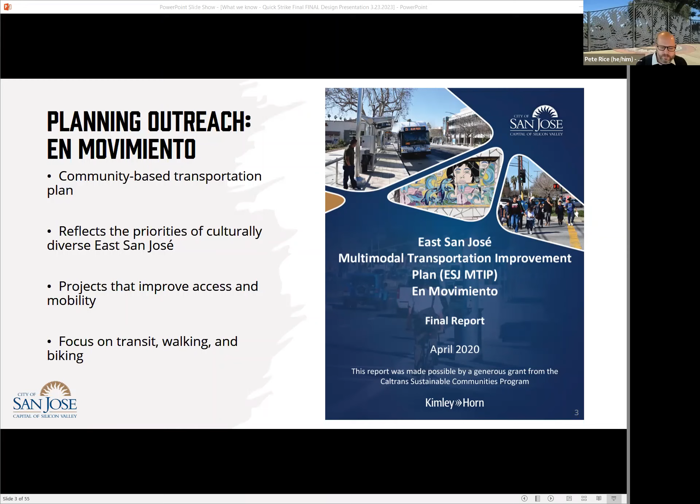These are some of the key takeaways from the Movimiento planning process. We asked community members about challenges to walking and biking and taking transit in East San Jose, and high vehicle speeds were cited as the number 1 challenge. We also asked about potential treatments to address issues, and traffic calming and enhanced pedestrian crossings were 2 of the treatment options most supported by the community. We asked community members about their priorities for improving transportation in the Movimiento planning area, and safety and health were among the top community priorities.

Finally, something we heard quite a bit from the community is that implementation of projects is a priority, right? In other words, less talk, more action. We were politely asked to start delivering on projects.

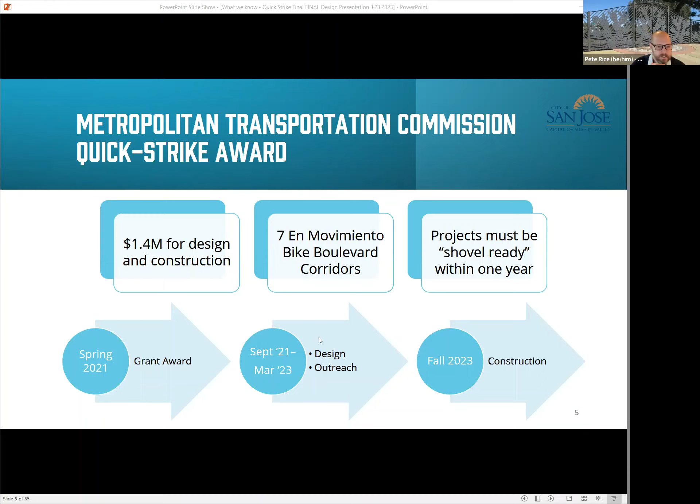So that brings us to how we got here tonight. This project was made possible by a grant from the Metropolitan Transportation Commission, that's MTC. It's a program they call Quick Strike. We were awarded $1.4 million for design and construction of 7 project corridors from Movimiento. The catch is that these projects have to be ready to go relatively quickly. You can see from the timeline here, this is actually a little longer than the initial timeline because we received an extension, but initially we had about a year to complete or to have these projects ready to go. Shovel ready is what it said.

So these are the project goals that have been stated from the beginning, and I think they align well with what we've heard during Movimiento. We want to make these streets safer for all, but especially our most vulnerable roadway users. We want people to slow down, and we want to create a network so people can access a lot of the great places we have on the east side.

So for those of you that are new to this project, it's these corridors in green that we're talking about. Tonight we're focusing on these, we call them 3 corridors, it's really kind of 4. All of these except for 21st Street are bike boulevards or shared streets, meaning bikes and cars share the same travel lane. And to make that safe, we employ traffic calming.

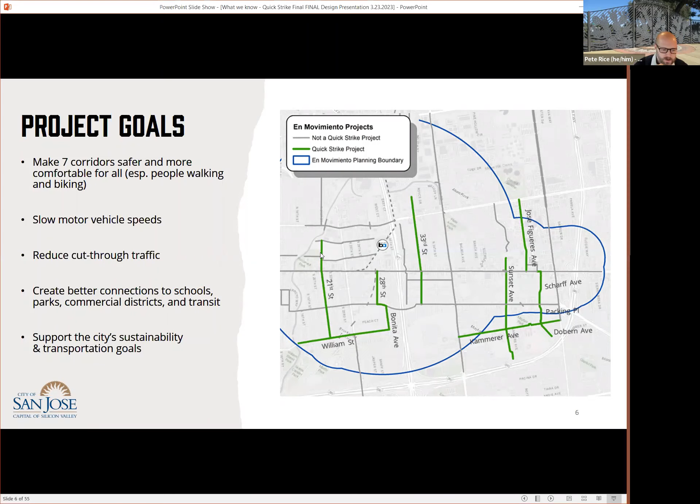For streets like the 7 project corridors, where you're going to have bikes and cars sharing the lane, we have target speeds of 20 miles per hour and volumes of 1,500 cars per day.

As you can see from this chart, nearly every segment, save for 21st Street and Scharff, exceeds that 1,500 target ADT.

My computer really wants to update some software. It keeps making that noise. I don't know if you guys can hear that, it's a little annoying.

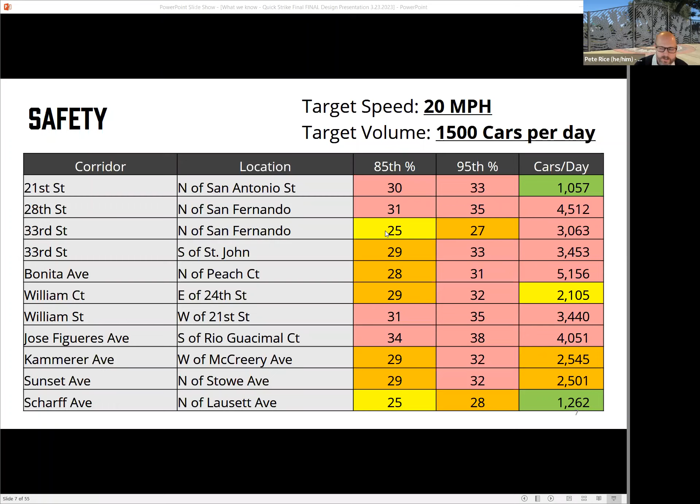Speed is a very important issue. You can see here the chances that you will survive a collision increase dramatically as speed drops. At 20 miles per hour, you have a 90% chance of surviving. When you get to 40, it drops to 20%.

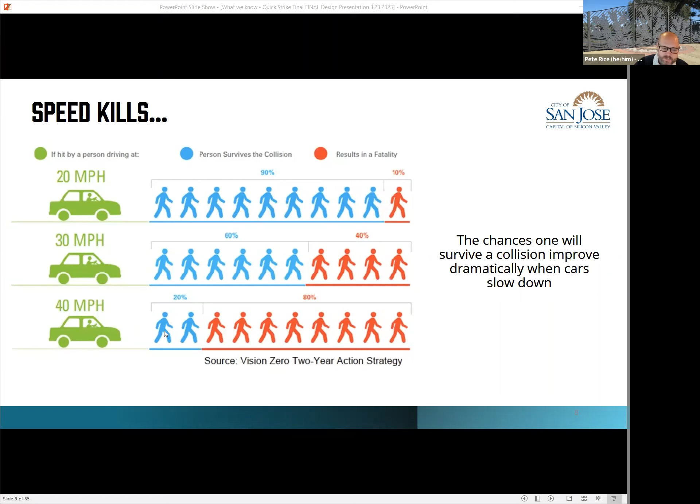This here is a map of our Vision Zero corridors. Vision Zero, if you're not familiar, is a citywide program to eliminate traffic-related deaths and serious injuries on our roadways. These Vision Zero safety corridors are the most dangerous streets in San Jose. You can see many of them are concentrated here on the east side, the southeast. There's also Saratoga Avenue in the west, but a lot of them are over here.

Now, we're doing our best to make these streets safer, but what we're also doing is providing safe alternatives. You can see there's King Road here and Jackson Avenue here. That's what this one is.

Among our project corridors, we have 33rd Street as a project corridor. We have Sunset, we have Jose Figueres, and Sharp. Those are all parallel to these, so alternative routes is one way to put it.

Then going east-west, of course, we have Santa Clara Street here, Story Road. And then in our project corridors, we have William and Kammerer, and then we also have a project from a few years ago on San Antonio.

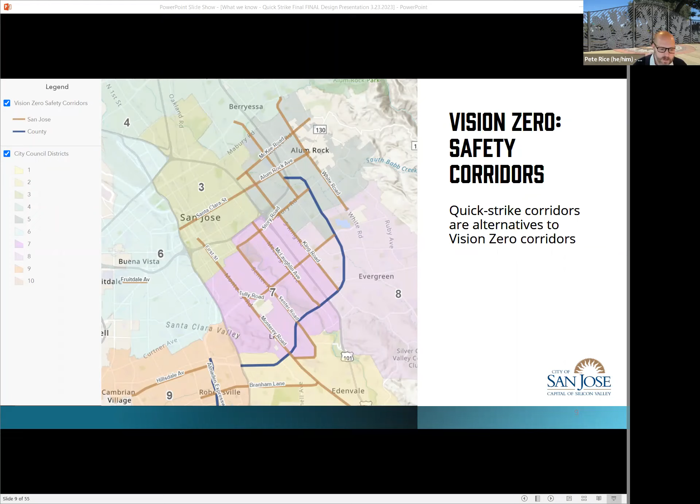So that is some of what we know. Do we have any questions or comments before we go on to what we've heard?

See a few chats. Well, you mentioned Jackson. Yes, so we're going to need another meeting on Jackson. And like you said, Jessica has more information, and that's why I'm just requesting another meeting on Jackson.

Yeah, absolutely. Like I was saying, another team has been working on some near-term improvements, and Jess can fill you in on that stuff. We thought we were going to get $10 million, but we were awarded about $4 million. We are working on securing some more money, but we're just going to have to do it piece by piece and keep looking for these pots of money.

I mean, who did we make mad? You know what I mean? Yeah, I mean, we got a lot of money through OBAG. It was overall a success. Yeah, we also need a lot of improvements, so $1 million would have been a success. Yeah.

All right, anyone else? Should we go on? All right, let's go on.

So what we've heard: what we know was the takeaways from the planning process, the grant requirements, and some safety data. What we've heard is the outreach that we've done the last 2 years and what we've heard from the community during that outreach.

So this is the outreach overview. This is only the design portion of outreach. We started that in September of 2021, and we've really done an unprecedented amount of outreach for a design process.

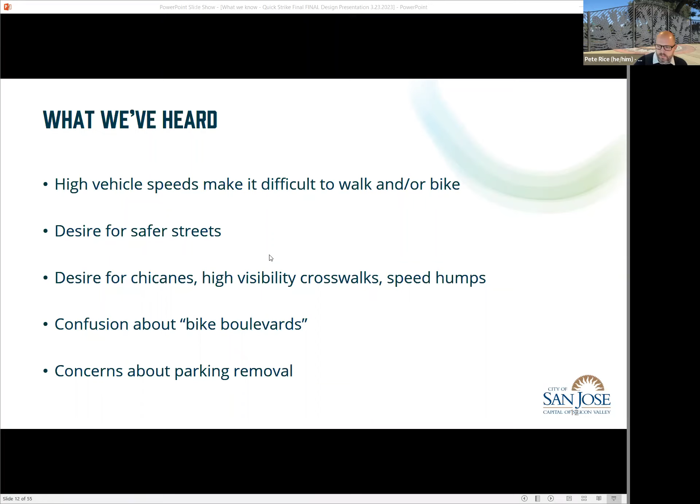So that's a summary of the outreach from the last year and a half. Do we have any questions or comments, or should we get going on the treatments?

Are we talking about King Road here or no? No, King Road is not part of the quick strike. It is a Movimiento project, but not a quick strike project. Okay, these are all the smaller quick build bike boulevards.

So in this section, I'll go over the treatments included in the designs, talk about their benefits and how they address the issues that we've just gone over.

So again, I touched on this briefly, but just one more time since there's been some confusion. A bike boulevard is typically a street that does not have room for bikes and travel lanes. So people on bikes and drivers must share the travel lane. And to make this safe and comfortable, we employ traffic calming, which means infrastructure and striping that increases driver awareness and encourages slower speeds.

And this is just a bit about the materials we're using. This project was originally envisioned with quick build materials in mind. A quick build means cost-effective paint and plastic treatments that one can employ in the near term to see project benefits quickly. We've used this quick build approach a lot with the Movimiento projects because we're trying to deliver the projects ASAP, right? We heard you all when you said you wanted more action and fewer words. And this doesn't mean that we're not going to pursue long-term beautiful treatments, like they have over in Naglee Park. We will, but for this project, this is what we're using: the FG300 curb system.

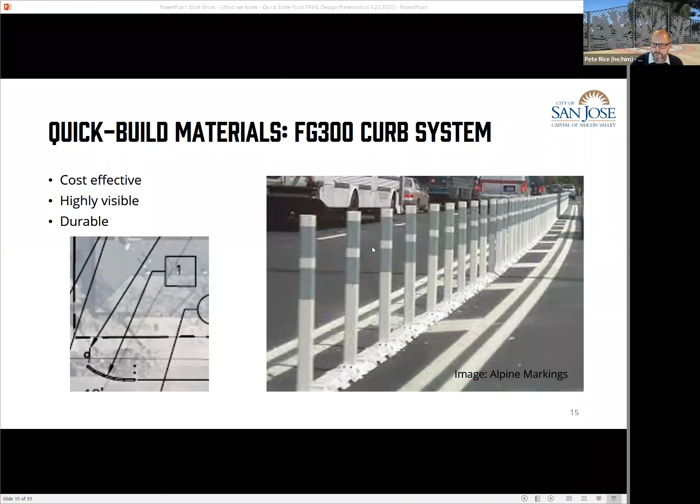All right, so let's get into the treatments then. So the first treatment we have are curb extensions, also known as bulb outs. Curb extensions increase visibility by preventing parking close to intersections or at mid-block crossings. And they also reduce the crossing distance for pedestrians and encourage drivers to slow down.

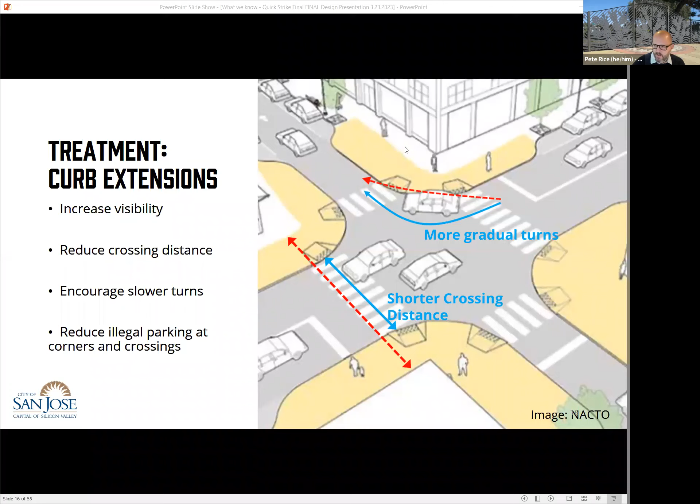You can see where the white is here, that's where the original curb is. You bulb it out, and then you only have to cross this much, whereas originally you had been exposed for the entirety of this red line. And then this is showing how you could take a sharper turn as you go around this corner without the bulb out there. Here you have to take a more gradual turn.

Where on Kammerer is that?

I would have to look exactly at that. Okay, just note the question there. Yeah, usually they're at the corners, so I would imagine at King Road. This is a picture from 28th Street.

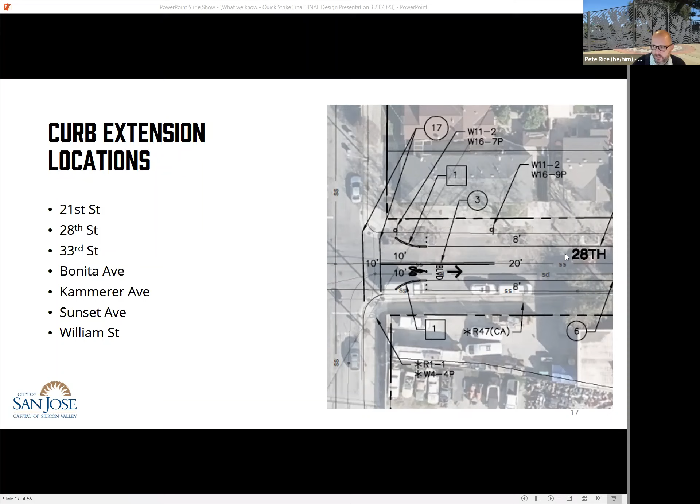So is that going to be red where that car is now as well? Yeah, there could already be red there. I think there's another picture. It looks like there's a lot of illegal parking. That's one of the things this project will help with.

So real quick, that crosswalk is not narrowed by a concrete bulb out? No. And I should add, I made this image before the final designs were done. There will not be a painted crosswalk there.

Will it be an enhanced crosswalk with stripes? There will not be a crosswalk on 28th, except for at 28th and San Antonio, right by the store there. So I can tell the people I talk to, why is a crosswalk being removed? The crosswalk's not there today. That's just something I drew in.

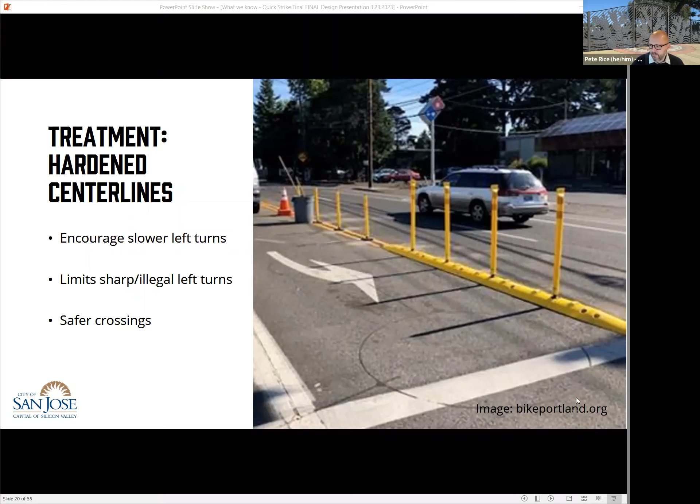And that's that yellow plastic, right? Yeah, it will be white in ours, but I found this picture that I thought looked pretty good. This is in Portland.

So real quick, notice that those four corners are not parallel or perpendicular to each other. Yeah, it's not perfectly square, is that what you're saying? Yeah, because that's an issue that blind people have.

And that's why in crosswalks like that, we've asked for -- well, we said bricks, but DOT said no. But we could put hardened concrete with brick forms in it so that the blind can feel with their feet where they're going, because as you know, Mary and her husband at Little Portugal would walk into traffic by accident because they were blind, at King and Alum Rock.

Yeah, that's the one crosswalk that you talk about a lot. Yeah, Natasha's actually done a lot of work on this issue in her previous job. I don't know if you have anything to add there, Natasha, not to put you on the spot.

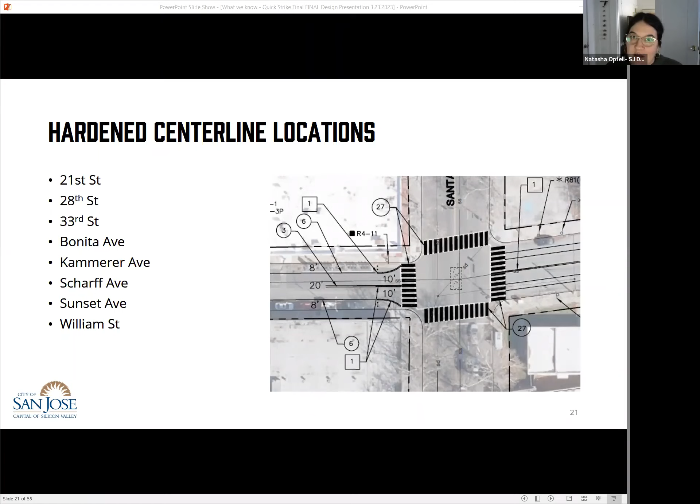Oh no, that's okay. So right now, this project is not going to change any concrete, but as we look for long-term solutions, the city is no longer using these diagonal ramps because they do not orient you to how to cross the street, which direction to cross. It kind of shoots you in the middle.

So whenever possible, we're adding two directional ramps at least. And we've also begun a better relationship with the Independent Living Resource Center and the Silicon Valley Center for the Blind, to get best practices on how they train blind and low vision folks that use their center. So we're really trying to get up to speed on how we can provide the most accessible environment possible.

So if this project gets funded and we're able to do the hardscape improvements, which we hope to do, we could be straightening out the intersection, adding concrete bulbs that would make it easier for people with disabilities. I want to thank you guys for recognizing that.

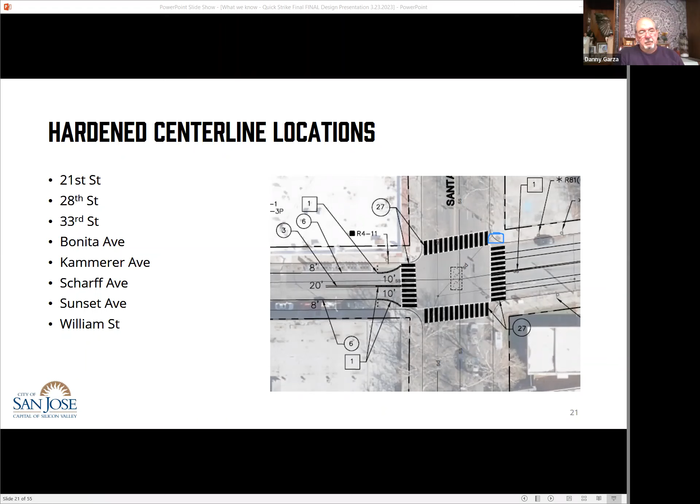So Pete, there is no red line there. And there is a red line curb. There is a red line here. Yeah, I can't tell if it's farther. It doesn't look like it's farther, actually.

But in our neighborhood, the same thing. There is no red curb in front of the fire hydrant on East St. James. People just park in front of the fire hydrant. Yeah, we deal with that. We don't call traffic enforcement, we call the cops, because that's a safety issue in our neighborhood. And do the cops come? Yes, and they ticket. Well, that's good. Yeah, I've been a little shocked at some of the parking behavior that I've seen.

You know, we did that project on St. John, closer to downtown, and have the corners painted red like this, and it's striped out. I mean, you should know not to park on a striped corner with a red curb, and St. John, nobody parks there anyways. There's tons of parking spots, but people are parking illegally. Anyways, I could talk about bad parking all day.

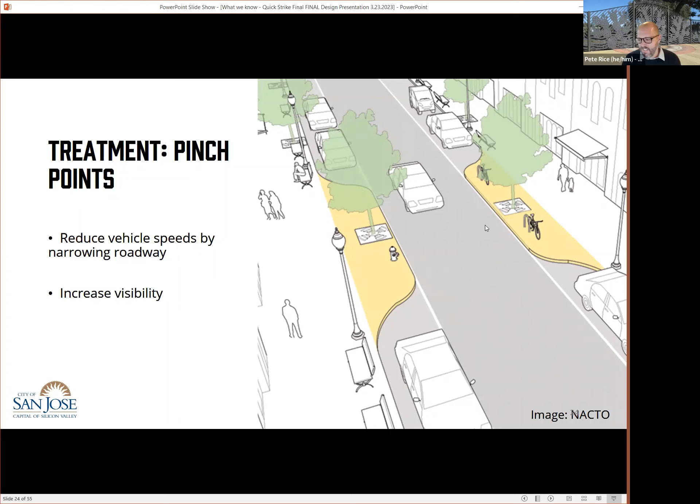Are you gonna put them on more sections than just this one at Kammerer? I mean, if we have streets and this is successful, are you gonna put them at multiple spots on the road? Yeah, okay, so these are the corridors, and you can go into the plan sets. When we were doing this project early on, we would go corridor by corridor and look at all of them, and it took a long time, and I think a lot of people lost interest. I feel like just going over the highlights here and some renderings is better. And then at your own leisure, I encourage you to go to the website and look through the plan sets if you want more.

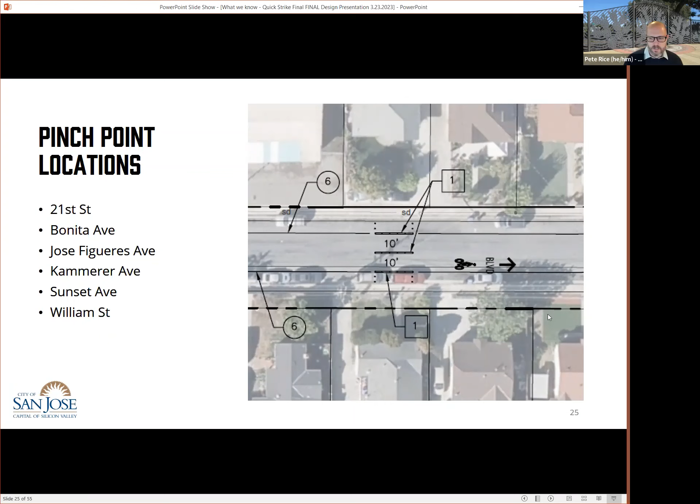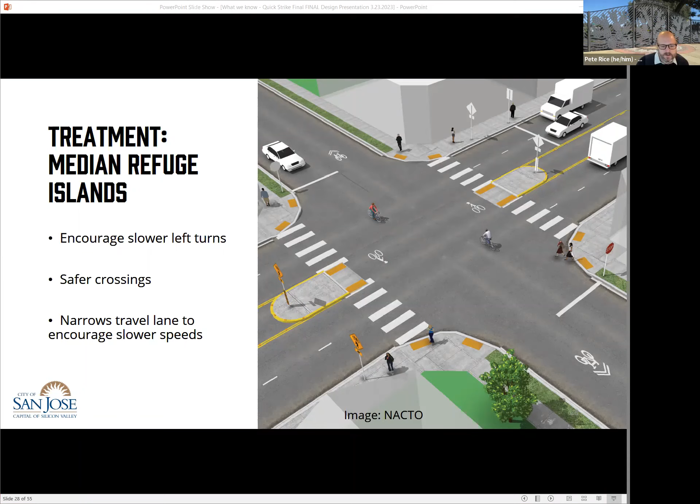Let's go on to the next one. That's median refuge islands. These are somewhat similar to the hardened center line, but instead of one row of bollards, we go 3 wide. Like the hardened center lines, they encourage slower turns and safer crossings, and they also narrow the travel lane to encourage slower speeds.

Pretty common treatment, as you can see from all these corridors. This is what it looks like on the plan set. The hardened center line was just one down the middle. Here we have a row of posts, then a post in the middle at the front and back, and then another row of posts.

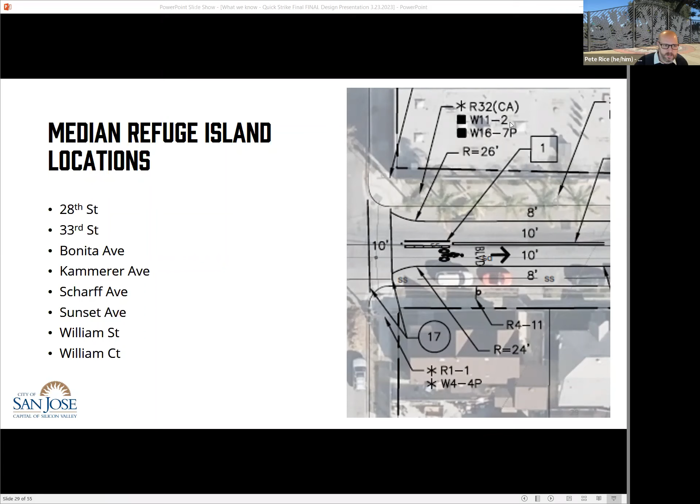Next, we have chicanes. Chicanes are where we use curb extensions to create an S curve in the roadway. This encourages drivers to slow down since the roadway is no longer a straight shot, and you have this shifting line of sight. One good thing about these is emergency vehicles can get through, as compared to speed humps—they can still get through speed humps, but they have some trouble with them.

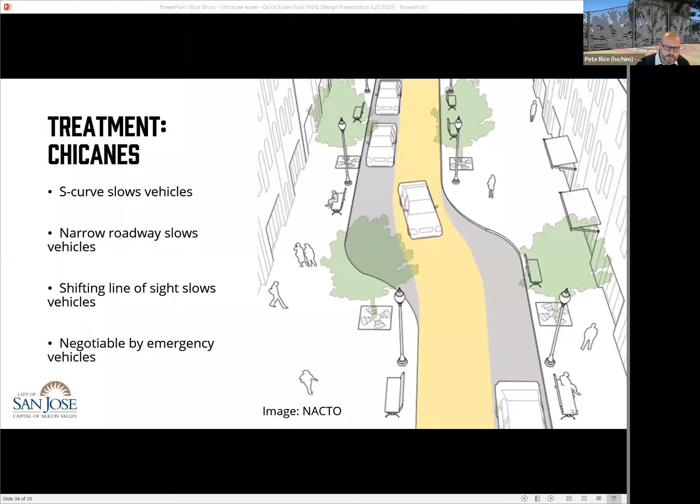Joan, were you going to chime in? I only wanted to say one thing about the chicanes, which until last night's presentation I wasn't really sure how these would be implemented. I realized that on South 17th at San Antonio, they actually did put in a chicane, and I never noticed it because it's at a T intersection and I turn left, so I've never had to do the S curve. But when I was walking, I realized this is a chicane, and I think it actually works there because people need to kind of go around it on their way if they're going to San Carlos. So I just wanted to say, I thought chicanes work better in real life than I thought from last night's presentation. Thank you.

Nice, that's good to hear. Yeah, there's actually one on Stanford campus, on Junipero Serra—they put in some over there. Well, I rarely leave my own neighborhood, much less San Jose, but thanks, I'll keep an eye out if I'm ever that way. For whatever reason, I drive that road a lot, and you really have to slow down to go around them. That's a road that really needed it, people speed on that all the time. I go to the Dutch Goose—I don't know if anyone's ever heard of that, it's a really good burger place in Menlo Park. Little plug for it, so I built a lot of stuff at Stanford. I know what you're talking about. The Dutch Goose or the chicane? No, the Dutch Goose.

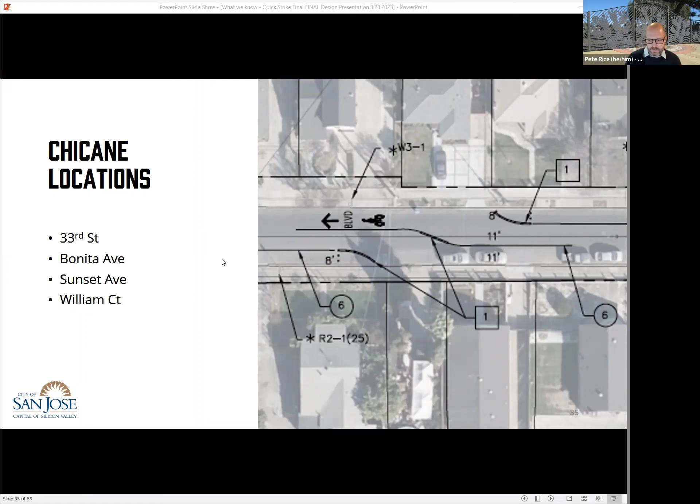This is 33rd Street. From an aerial view, what it looks like today—you can see the parking is just on the left side, the west. This is what it will look like afterwards. This isn't the exact location of the chicane, but you can see we shifted the parking over to the right, creating this S curve. You have to slow down. The way it works, there will be 2 more of these down here, so you go back and forth.

Yesterday I was on San Antonio Street and there was a guy on a bike. It was a pleasure to slow down behind him. Right there by the church. But you know me, I'm never in a hurry, I'm retired. Nice, I could have been following a chicken.

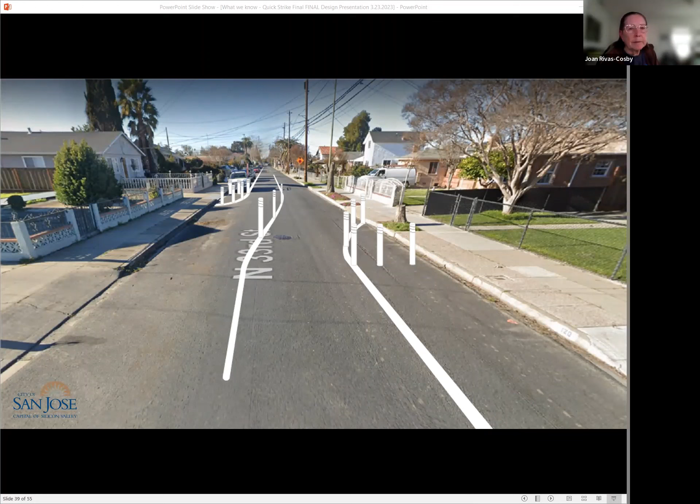I just wanted to say Danny is a model of the person who understands the bike boulevard. I was walking today on San Antonio and there was a person exhibiting road rage behind a bicyclist, to the point where he moved into the oncoming lane of traffic, which stopped somebody coming west. We've always talked about needing more education about what a bike boulevard is and what it means to share the road. This guy in a big red pickup had no patience whatsoever, unlike Danny, and it was frightening to watch.

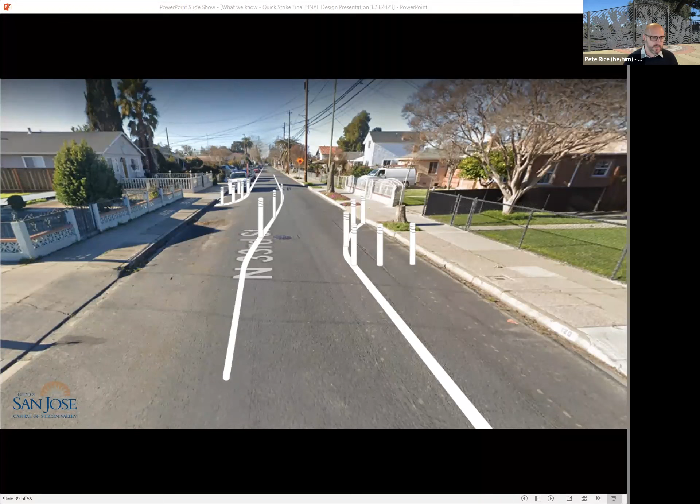I agree. When we had an event over at the Portuguese church, we rode San Antonio and turned left on 28th Street coming from downtown. To make the left, we were taking the lane like you're supposed to, and someone was laying on the horn. It's a little frustrating - there's still plenty of education and work needed to make people not feel comfortable driving so fast on these streets, and truly intimidating bicyclists like they're entitled. That was the worst part. If I was a newbie on the bike, who knows if I ever would have ridden again.

You and Joan had a good point - education is the key. We have to get into those neighborhoods on the east side, in the East Valley, where these new additions are going to be, and let them know, because somebody from Gilroy isn't behind that guy - that's somebody from San Jose. So we have to get education into the parents.

Good point, Denny. Let's go on to traffic circles, our final treatments, also known as mini roundabouts. This treatment slows vehicles through uncontrolled intersections and reduces dangerous collision types - you don't have head-on collisions or T-bone collisions.

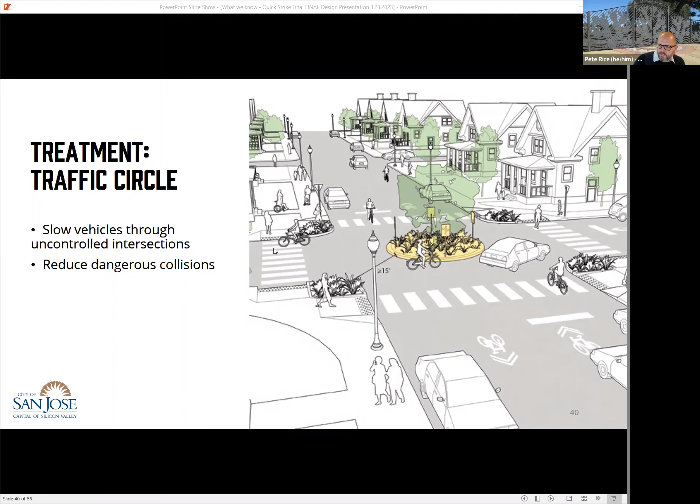We've recently installed some of these along San Antonio, as many of you know. But for this project we're going to use different materials. It's still a quick build project, but instead of ceramic domes and paint, we'll use bolt-on rubber and plastic curb systems. This is an example from San Francisco - you can see the approach island as well.

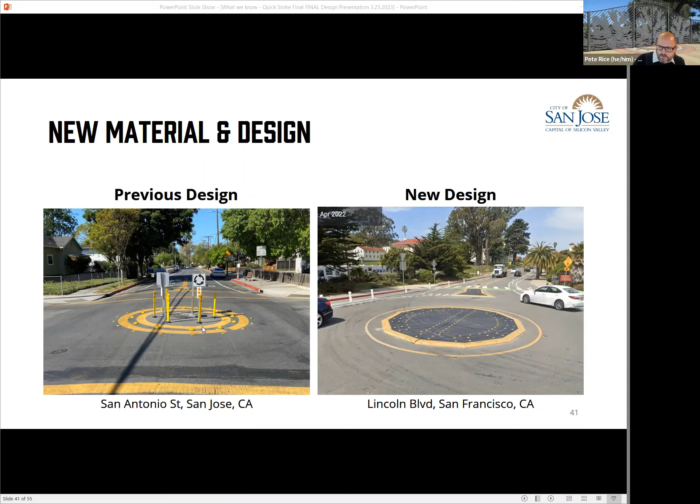This crossing will be nicer too, because you'll have to come out a little wider, giving better viewpoints for pedestrians coming around here. That's good because there's senior housing near there, the senior center down the street, and low income housing. There's also the Checkers, Rancho Verde area right there, people walking to the hospital across the street and the other medical buildings.

Do you think, Danny, that there's a need for more crossings across Jose Figueres to the medical center and the hospital? Oh, you're on mute there.

Technically challenged. I'm not a big fan of crosswalks in the middle of a block, unless they're really visible, like the one on Ernesto's sister's street in San Antonio, before the school, or the new one near the church. When they're well identified like that in the middle of a block, I'm okay with it.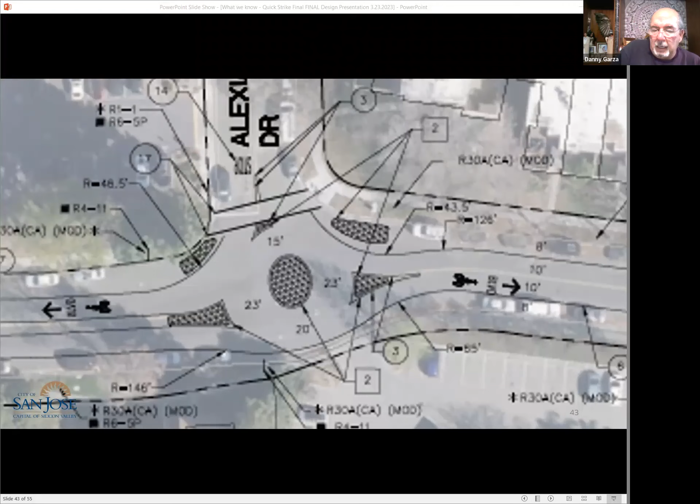On Jose Figueres, at Checkers, at Rancho Verde Drive, I think, because Checkers is the other street. Rancho Verde is a good place, then you have up there at McKee, and down here you're going to have the chicane from Alum Rock to Jose Figueres. So I'm not seeing a need for a crosswalk from here to Alum Rock.

Yeah, no, I was thinking more up north. There's a park there, and it seemed like an opportunity to break up the street a little bit. It's one of these long straight corridors when you get a little further north from what we're looking at here. Anyways, not part of the presentation tonight—we can talk about it another time.

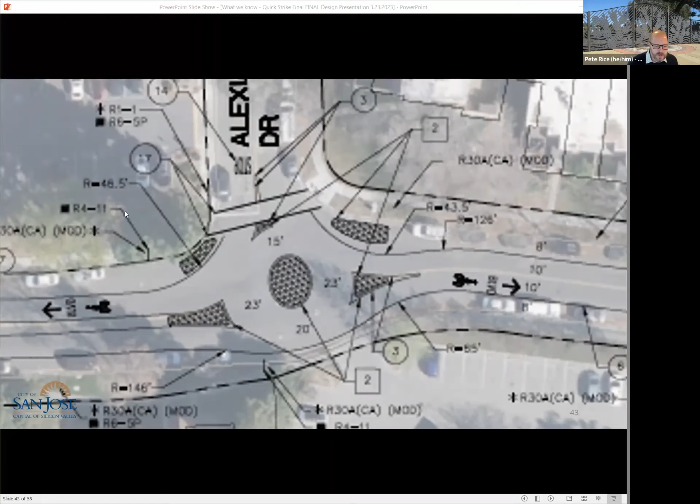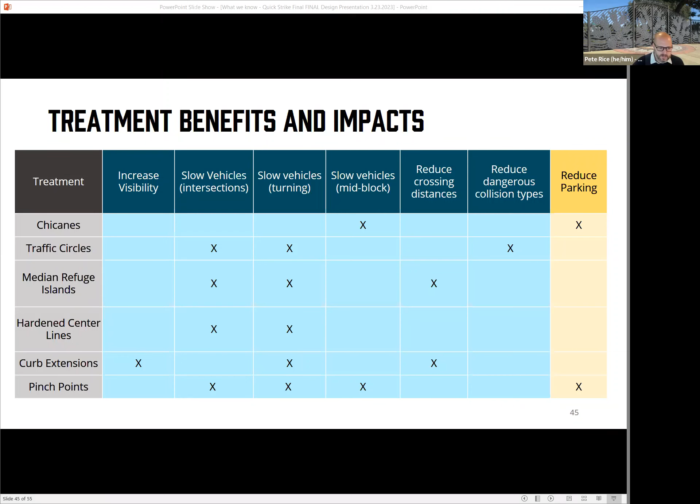There are some trade-offs though, especially with chicanes and pinch points—they may reduce parking, and I know for some people that's a big concern. So we did parking counts over the last couple months on the corridors where we're removing more than a few spots; if removing only 1 or 2 spots, we didn't do a count. We wanted a better idea of the impact of removing parking. In most cases, there will still be on-street parking available after implementation.

Ultimately, this parking audit did not change the designs of the projects. Safety is our number one priority as a city and a DOT, and the treatments we've included here are the best way to address the safety issues. We know this is difficult and frustrating for some people, but like I was saying, safety is absolutely our number one priority.

And do me a favor—yeah, I don't know what I'm doing, I don't know how to work my reactions here. I was trying to raise my hand.

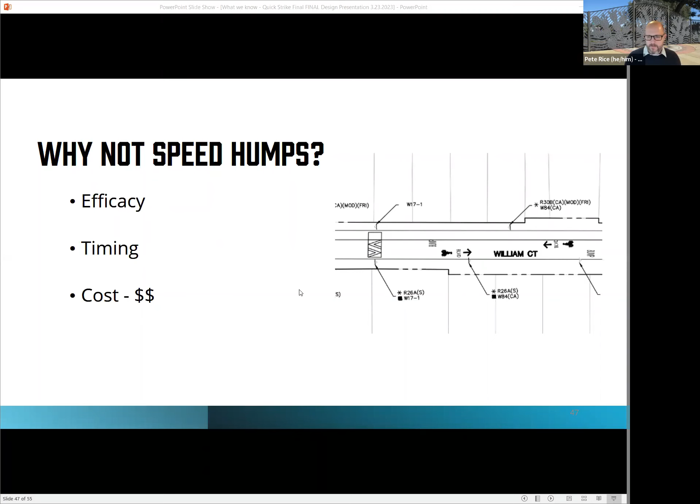And then we are also going to do an evaluation like we did on San Antonio. Once everything is built, we'll be looking at speed data and sending out surveys and looking at crash data and all the kinds of things to help us understand: are our treatments effective? Are they slowing people down like we hope? Do people feel more comfortable on these corridors? Are more people riding or walking, that kind of thing? And then that evaluation will inform whether we need to change things and what we should include in our long-term designs.

So that's what I have for the presentation. I'm happy to take any more questions or comments that you guys have. We've already talked a little bit.